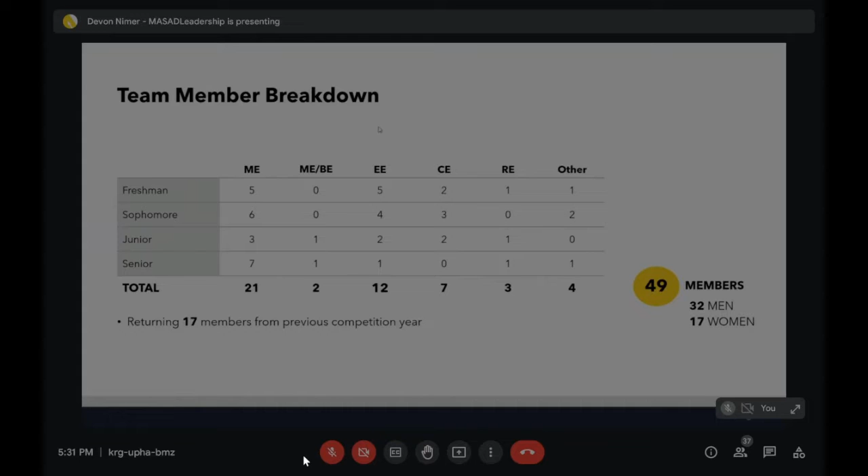Along with this, we will actually be having our certification class this year, as we did last year. It'll be led by Sierra, and we'll be doing open rocket classes and CAD tutorials, and we'll be launching at Alke Airport November 19th. We'll have 20 new flyers who will be able to get L1 certified. So we're hoping to get 20 new members this year after November. That'll be a really good boost for our knowledge base and getting everyone experienced in rocketry. We're really excited for that.

Each year we compete in Spaceport America Cup. The competition is to bring a payload to a target apogee. We'll be competing in the commercial off-the-shelf 30,000-foot category this year. So the target altitude is 30,000 feet, and our motor will be bought through a vendor, not made by students. Our location will be Spaceport America near Las Cruces, New Mexico, from June 19th to the 24th, 2023. It's hosted through ESRA, and the sponsoring agency is Spaceport America.

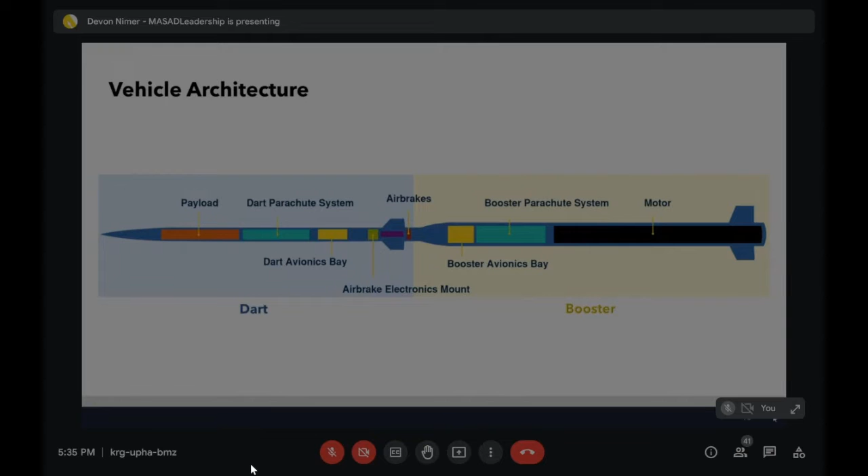Here you can see our vehicle architecture from the Dart to the booster. We actually have a boosted Dart configuration this year. It'll be a single stage with one motor, but it'll actually separate by drag. We'll go into that a little bit more in the airframe section, and you can see all the different components that we'll be going over in more detail in each project overview.

So it was a 6-inch diameter. Now we're switching to a 5 to 3-inch diameter, transitioning from a 5 on the bottom in the booster to a 3-inch in the dart. CubeSat payload is not possible this year, so if we wanted extra points we wouldn't be able to due to the 3-inch diameter. Also, we'll have more COTS microcontrollers in our payload this year for reliability. Since we have a newer electrical team, this will be very useful for us.

We also have airfoil fins with our new 30,000 foot apogee. We found that would be very useful for our flight. Some similarities are the air brakes, a similar or slightly different design, but similar application. Electronics for recovery are going to be the same, along with our tele-GPS.

So here's our payload summary. It's a body tube strain and data collection experiment. The main goal is to retrieve reliable and accurate flight data. That's what we've wanted to gain in the past, and we want a reliable way to give us data on how our flight went and information for next year. So sensing things like velocity, acceleration, temperature we've done before, but we want to see humidity, and also the big one is strain on the body tube, so we want to see what sort of strain forces on that body tube in the dart are occurring.

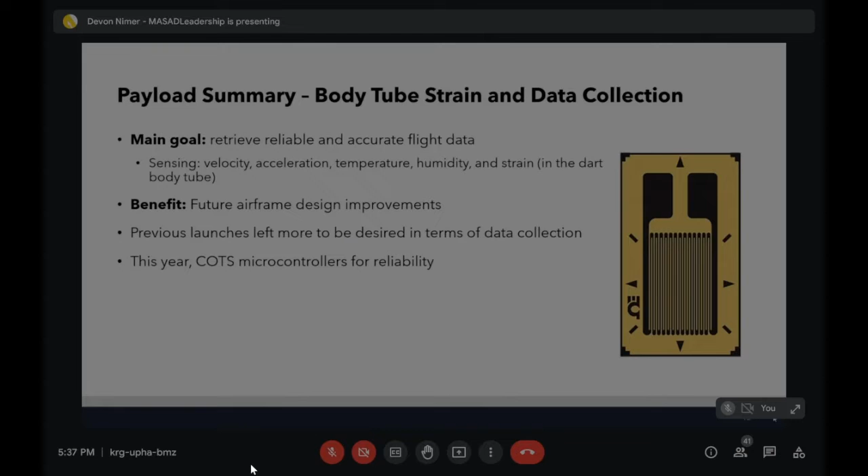And finally, here's our timeline. You can see some key points and milestones that we actually have. We began in June with our e-board elections, and we've gone down to October now, where we are at PDR. After that, we'll be gearing up for our first season phase in manufacturing. We also have some competition outlines if you'd like to read further. We sent these slides out, so feel free to view.

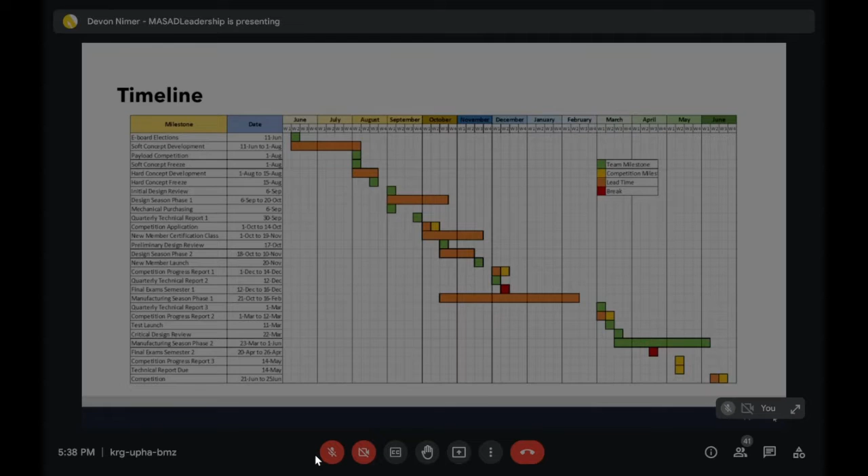Hi everyone, I'm John Florin, the mechanical lead. I will be taking you through the team structure, our systems engineering, our ConOps, and our mass distribution.

So I'm going to take you through the different sections of our rocket, starting with our upper dart. At the tip of our upper dart, in the nose cone, we're going to have a tele-GPS, where it will avoid interference from the metal frame structure of the payload. Then we'll have our payload to house all the data collection electronics. We'll also have a camera system mounted at the bottom of this payload, and below our payload we will have our dart parachute, which will be reefed.

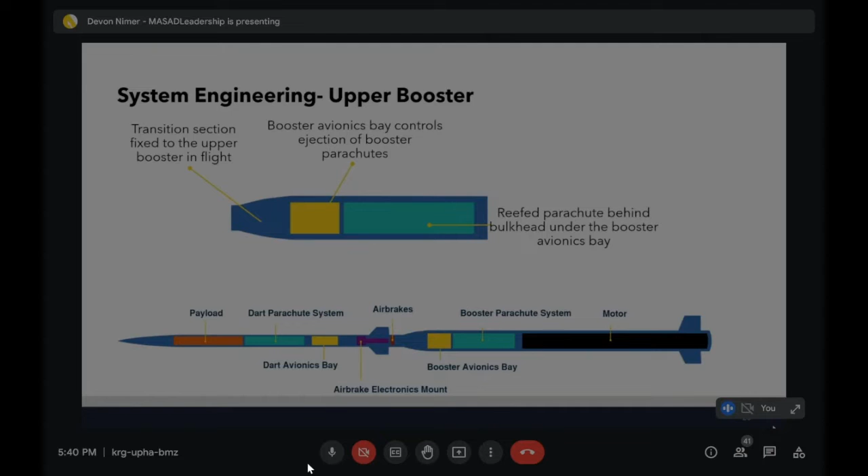To start off the booster, at the tip of it, we will have our transition section, which will connect our dart to our booster, given that it has a varying diameter. Below that, we are going to have our booster avionics that will control the deployment of our booster parachutes. And at the bottom, we will have our lower booster, which will consist of our motor and our airfoil fins. We'll have a thrust plate at the bottom to transfer the forces into our body tubes.

On the left of the screen, you can see the general overview of how different stages of the rocket will occur. We start with ignition, which takes us to motor burnout, and at that point our dart and booster will separate so the dart can achieve a higher apogee.

While the dart's achieving apogee, the booster will have already achieved its own apogee, where its parachutes deploy as reefed parachutes. Further along, it deploys its main closer to the ground, and then the booster hits the ground. For the dart, as we approach apogee, we plan to deploy air brakes if we're exceeding our target apogee of 30,000 feet. Once we hit apogee, we deploy another reefed parachute, which expands to main as we get closer to the ground.

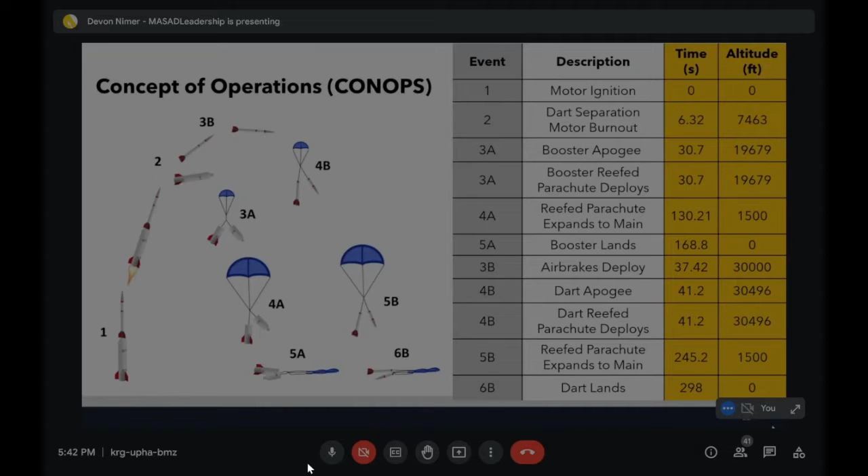And I'll hand it off to airframe propulsion.

Hello everyone, I am Andrzej Sterko, and I am airframe and propulsion lead. Today we will talk about air brakes, electronics, fins, and general airframe. I will let Sierra start.

Hello, I'm Sierra Stockwell. Today I'll be presenting the air brakes. We also have some new members working with us on the air brakes, Devansh Patel and Taryn Butler, but they're not quite ready to present yet. First, we're going to go over our purpose, then design breakdown, prototype, timeline, and testing.

The purpose of our air brakes is basically to decrease our apogee to get it as close as possible to target. We plan to overshoot, then bring our apogee down by releasing the air brakes at a select altitude. The air brakes utilize both electrical and mechanical systems. The difference between this year and last year's air brakes is that instead of using a stepper motor, we're using a linear actuator, so instead of twisting to open, they will be pushed to open, which helps with a lot of the issues we had last year. The benefit of air brakes is that they could improve the team's apogee score and increase design points.

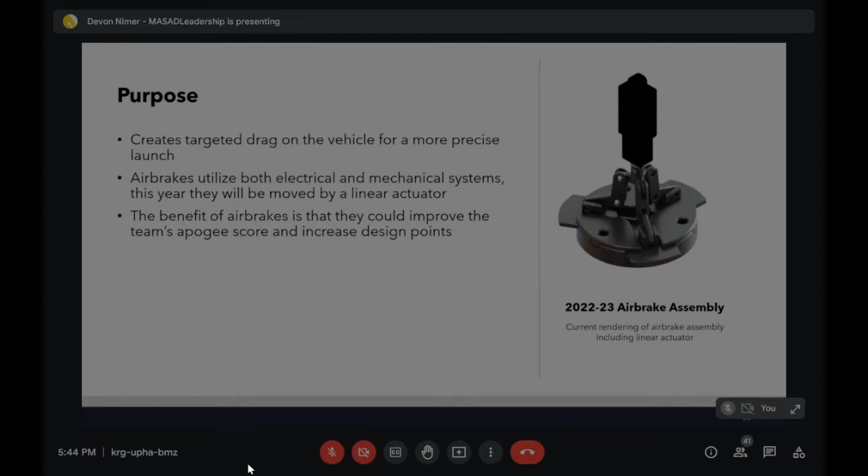There will actually be our linear actuator inside of it. The air brakes will slide up with the linear actuator and its mount into the bottom of the rocket. The electronics that attach to the linear actuator will mount above and attach into the top part of the linear actuator. We have added clearances between moving parts to avoid grinding, as that was a huge issue before, and tolerances will also be calculated before manufacturing.

We haven't begun CFD yet, but that is a huge part of this process and we will be starting soon. Our analysis season is beginning after this design review, so we will be testing if the air brakes make enough of a difference to justify having them, and if the wake after the fins is affected at all by the air brakes.

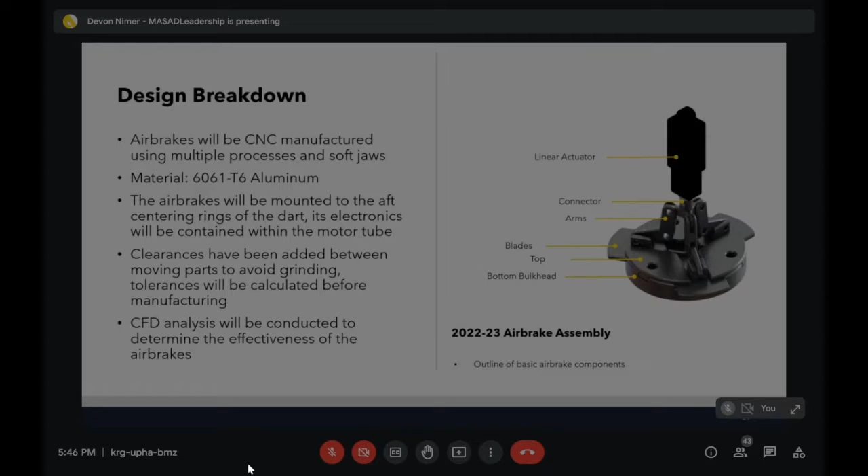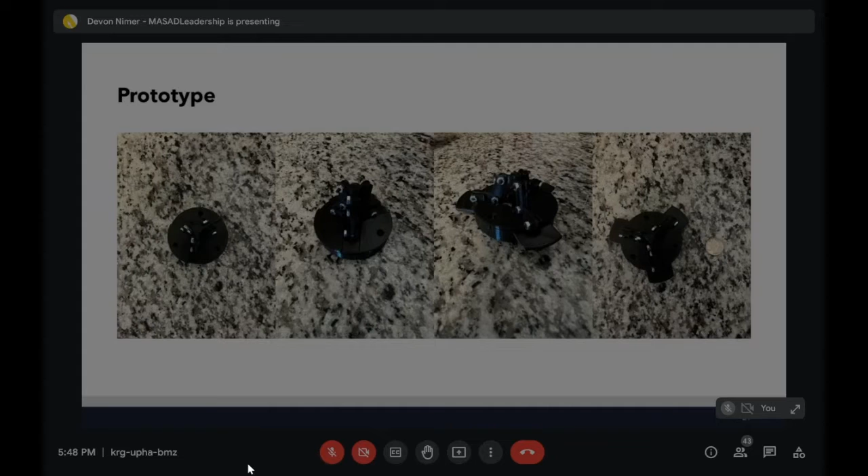Linear actuator testing we weren't able to complete yet due to the 3D printed prototype breaking a bit. So we've just got to reprint that little piece that the linear actuator attaches to, and then we will be able to test that soon.

And the metal prototype testing will happen sometime during manufacturing season, before the test launch, to test how the metal compares to the 3D print, since the 3D print experiences a lot more friction and we can't really lubricate it like we can with the metal part. So we'll see how that turns out compared to the 3D print.

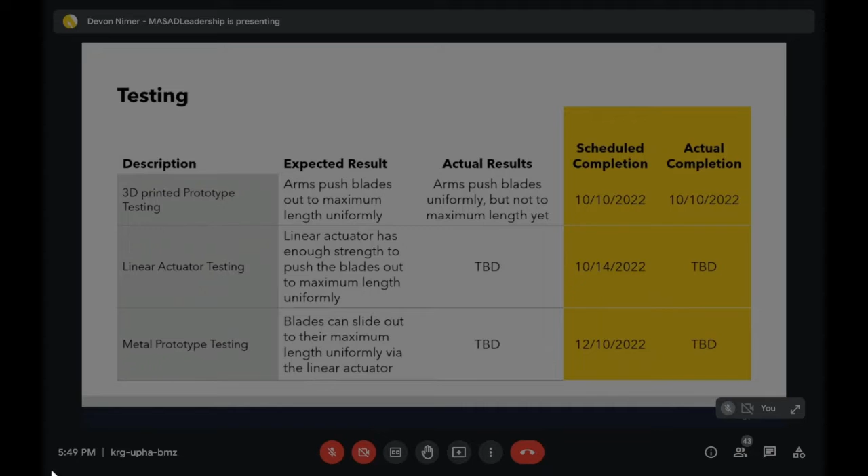Because of the size constraints of the 3-inch tube, we are going to have to use SRAD boards to mount all our sensors and SD cards and stuff like that. Aside from that, we're also going to derive an equation to find out what the proper linear actuator extension should be to get the proper extension for the air brakes plates.

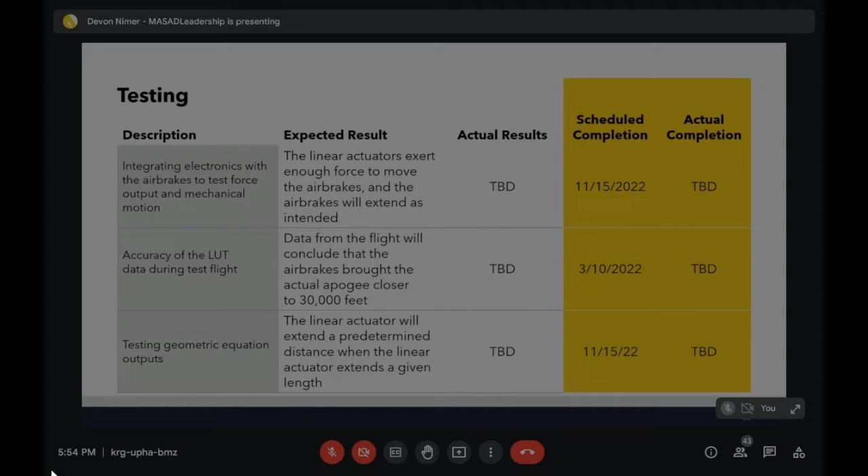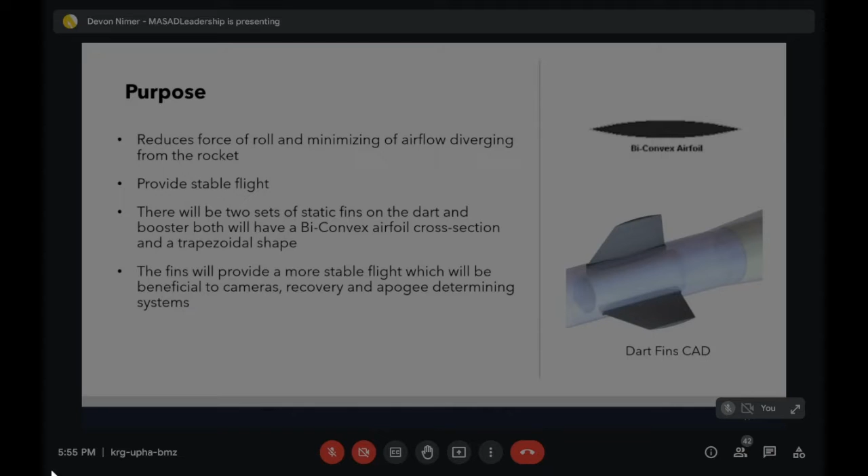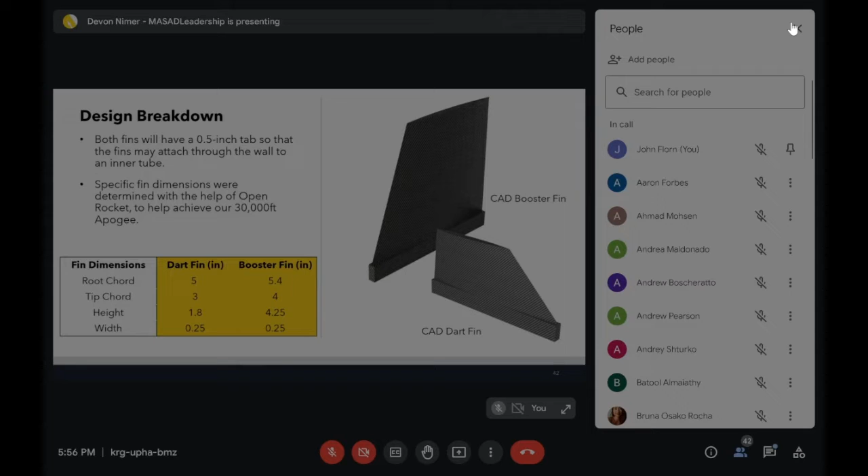Maxim. It looks like his microphone isn't working. No, we cannot hear you. Well, we'll see if you can get that working in just a second. Hello. There you go. Hi, I'm Maxim Rushko.

Sorry about that. So this is our design breakdown. Here you can see we have both CAD renders of both the booster fin and the Dart. We included a 1/2-inch tab on both fins so they could attach to the wall of the inner tube. That will help for mounting purposes.

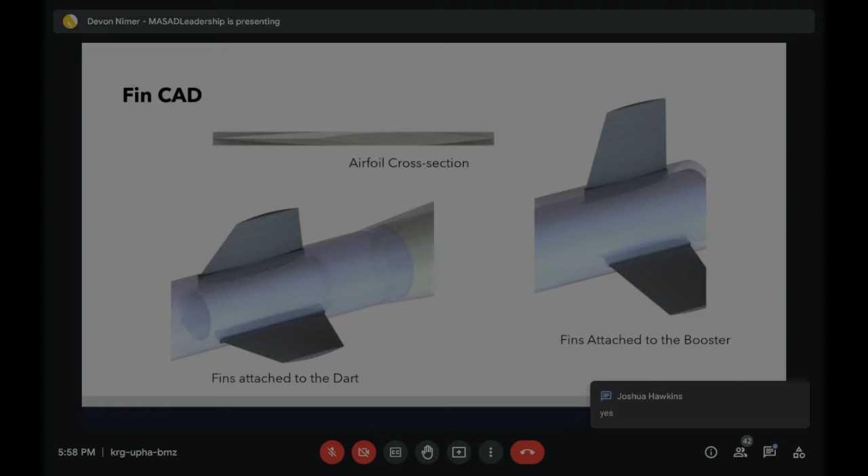So this is just a little bit of a breakdown of our fin flutter. The numbers that we calculated are using a theoretical shear modulus. We do plan to experimentally determine it once we get a nice specimen and we can take it to the lab. We use the equations shown on the right.

And so what we know is that our fin flutter that we obtain from using the equations on the right needs to be greater than our maximum velocity, which is 1915 feet per second. And so our Dart fins right now have about a factor of safety of 9, meaning that the fin flutter we obtained is about 9 times greater than our maximum velocity, and our booster factor of safety has about a 2.5.

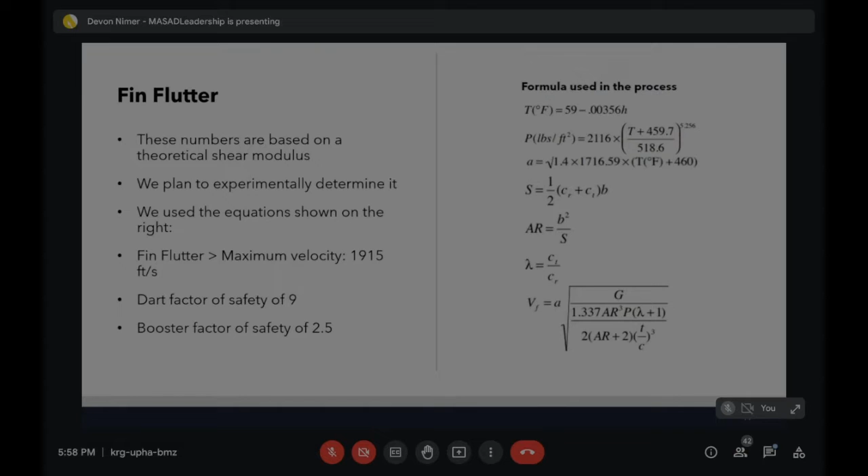Next slide, please. So this is just a slide on our fin manufacturing.

We've successfully made a fin prototype. We used 2 halves of a 3D printed female mold, and we made sure that these can be reused for all sets of fins. The fins are a carbon fiber epoxy resin, and they're a laminate, and they are not hollow, so it's just a bunch of layers of epoxy and carbon fiber.

There are about 30 layers, and each layer is rotated on a 90, 45, 90 pattern with epoxy in between. The 2 halves are then clamped together, and it is left to cure. No heat, no pressure required. And the fin tab is built into the mold.

On the right, the upper right, we have a picture of the manufacturing where we're layering the carbon fiber and the epoxy. And then we have on the left a finished fin. Next slide. This is just a picture of our fin prototype.

On the very left there, we have a head-on view. It's very thin and a bit difficult to see in this picture, but you can see the nice pointed edge and the rounded top. Then we have our side view, which is the trapezoidal side, and you can see there are a few imperfections on it, but overall it's a very good first prototype. And then we have an angled view there on the last.

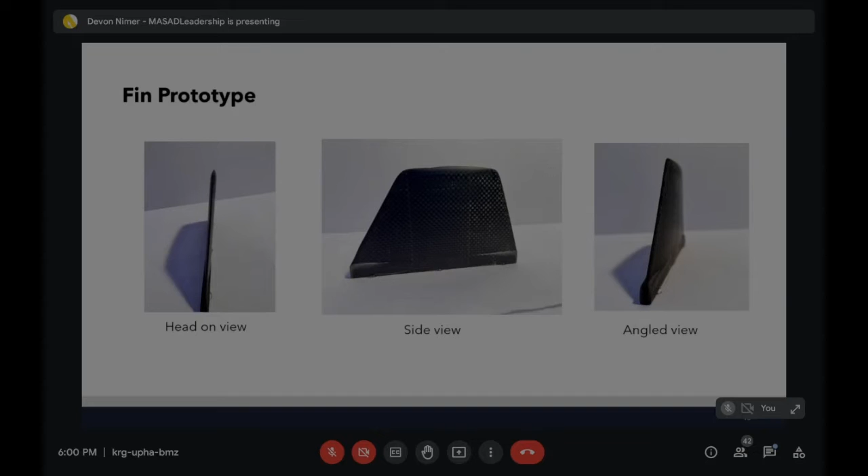Just a bit of a fin timeline. Our design season, we're well into that, and well into prototyping. We'll be beginning our analysis of CFD and more deep work in Open Rocket and simulations. After that is done, we'll be doing some redesigning, going up to about November, and then we'll start manufacturing. Manufacturing will continue until our test launch date of about March 11th. And then we'll go to final manufacturing, final touch-ups, final integration, fixing anything that broke, until competition.

So it's testing. We plan to test some manufacturing methods on how to make the airfoil shape, because that's been a big question in the past. Our expected result was that the fin would have the desired airfoil shape and wouldn't collapse in on itself or do any sort of weird, funky things. And that's what happened. The actual results: the fin had the desired airfoil shape, except for a few bubbles and a little bit of a divot on the top. That happened about a week ago and was completed about the day after.

We plan to experimentally determine the shear modulus so that we can get a more accurate number on our fin flutter analysis. We expect that the specimen will break, and then we'll be able to determine that number. We expect that to happen at some point in November. And then, of course, we have our test launch when the fins will be attached to the rocket. Hopefully they'll have minimum wear and they will not have broken off, according to our fin flutter. Our scheduled completion for that is, of course, the test launch, which is March 11th.

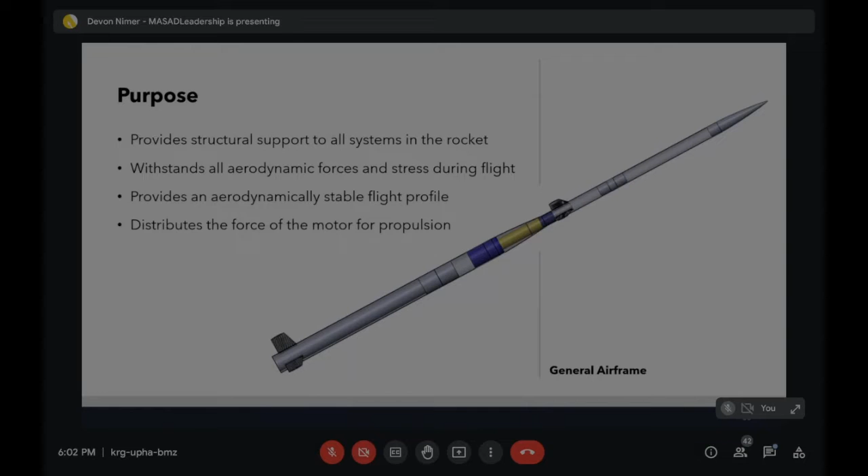For the design breakdown, the airframe consists of a COTS Von Karman nose cone, with the body and coupler tubes also being COTS G12 fiberglass. There will be a transition between the dart and the booster, which will go from a 3-inch dart to a 5-inch booster, as we heard before. The dart will separate due to drag naturally when the motor burns out. The total length of the rocket will be 12 feet 9 inches.

As mentioned earlier, the transition will provide an aerodynamic transition from both parts of the rocket. It will also be made out of COTS G12 fiberglass, just like the rest.

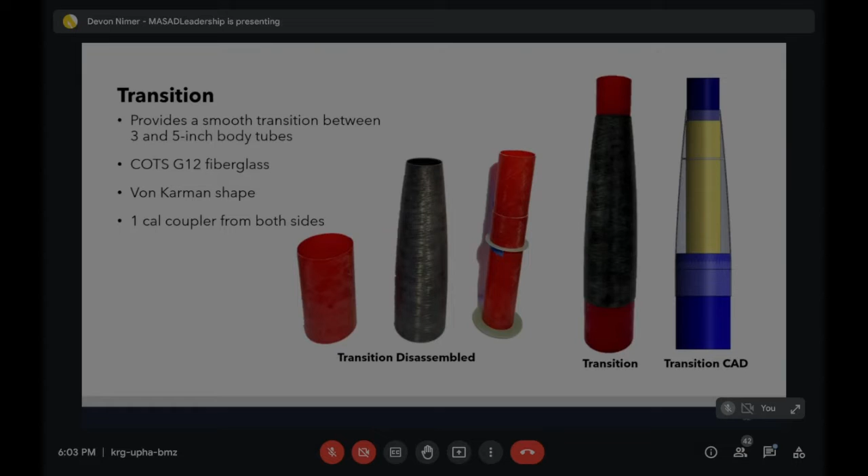So, some broad analysis. These are really rough right now since our systems are still being developed, so it's a living, breathing thing until all of the systems are fully developed. Right now our apogee is 30,400 feet, that's without air brakes, and flight time is 298 seconds, which is about 5 minutes. On the right is a graph that shows separation of the dart and booster. The important thing here is our max velocity — we're going almost 2 Mach, which is a challenge for us too.

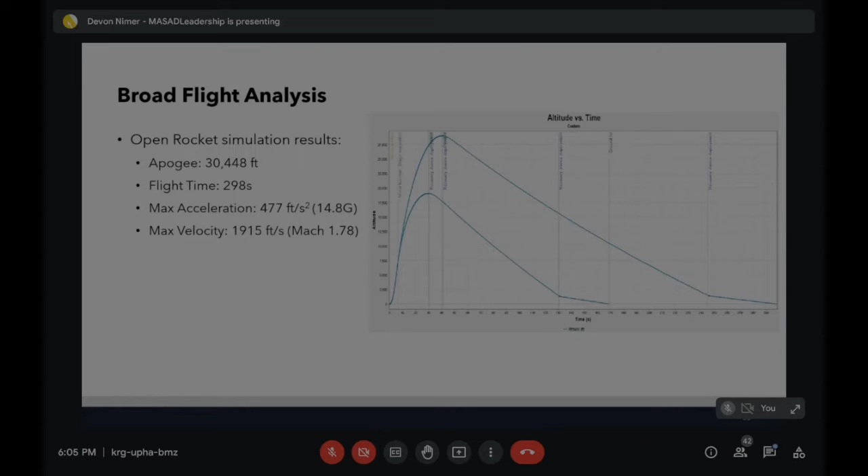Next slide. Here I'll go over our motor choice. We had another option with the N5800 motor, but we found through simulations that it's fast burning and our acceleration would go to about 22 Gs, which would cause a lot of stress on the system. So we chose a slower burning motor, the O3400, which gives a similar apogee, and our acceleration went down to 14.8 Gs.

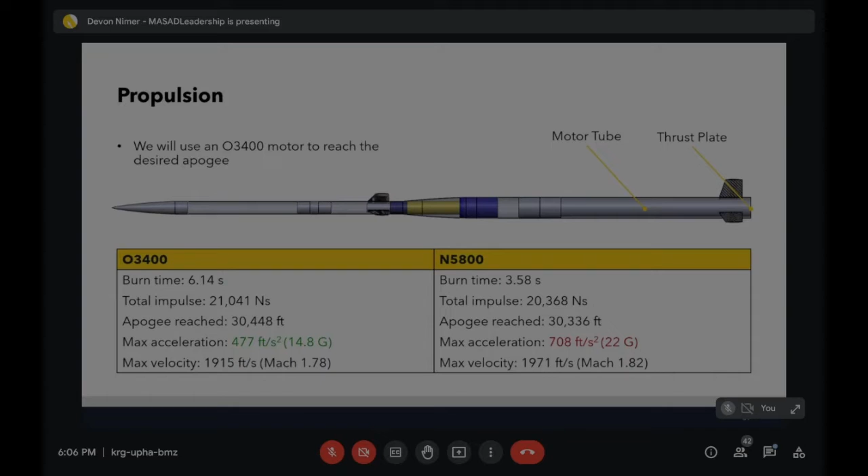Our general airframe timeline: we plan to finish the whole rocket before the test launch, and there are a lot of design adjustments we'll make as systems are being developed. After the launch, if needed, we might even rebuild the rocket. So we already purchased two sets of tubes and everything for two rockets in case we need to rebuild later.

For testing, one real way to test our rocket is to actually fly it or use a wind tunnel. Since we don't have access to a supersonic wind tunnel, we'll do a test launch in March in Muskegon using an M34 motor. We chose this motor because it gives similar stresses on the rocket, and it only goes to 10,000 feet, which lets us launch in Muskegon.

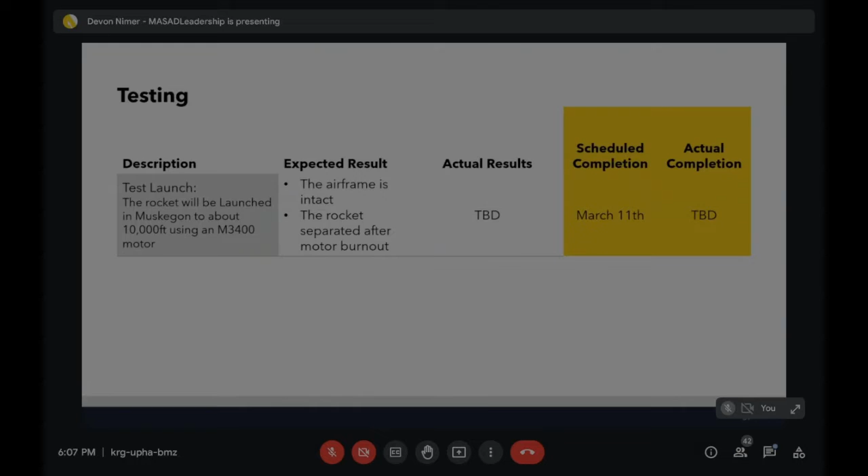Thank you. Hello everyone, I'm Jamal Kazada, and I'll be doing the parachute systems for recovery. Below are all the other people in recovery who'll do the next slides. Next slide. So, parachute systems.

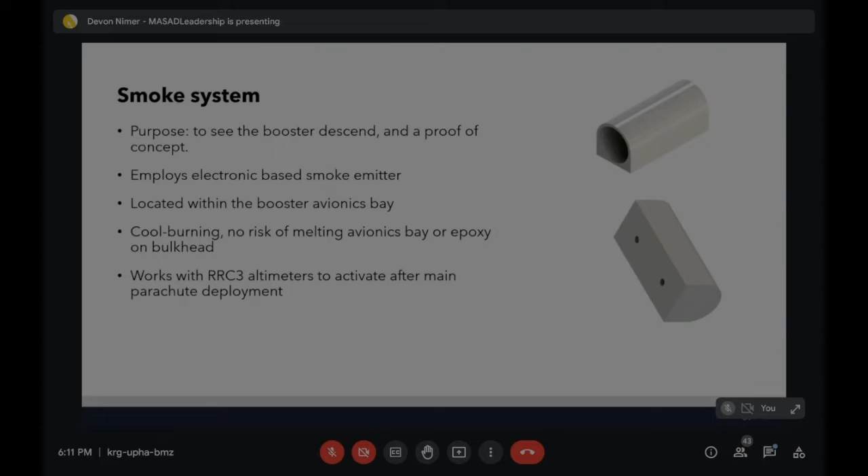Next slide. For our timeline, we have design season, then we get preliminary values, which is where we're at right now. Once everyone gets their masses locked in, we'll obtain final values and start manufacturing for the test launch on March 11th. If there are any changes needed, we'll readjust and possibly remanufacture or make edits to the parachute.

Next slide. For testing, we're going to use OpenRocket calculator to get better snatch force predictions, and that's going to be around February of next year.

All right, now on to ejection systems.

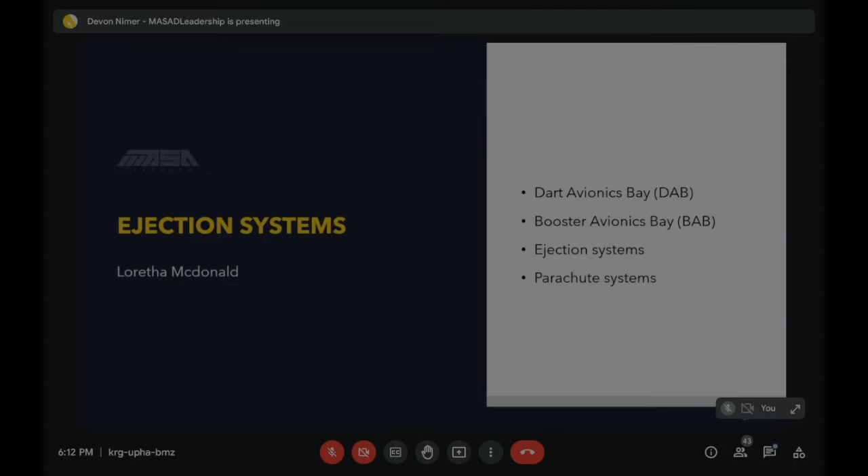This year, we will use Phoenix connectors to make integration across bulkheads easier, and we will practice assembling burritos with sand to get ready for launches.

Right now we are updating the values, seeing if there's any corrections that need to be made to the calculations, and we're going into manufacturing and testing, somewhat the ejection testing before the test launch. We'll adjust the values around March 20th to May 1st if anything needs to be changed for the main launch in June, and there will be a possible second ejection test early May.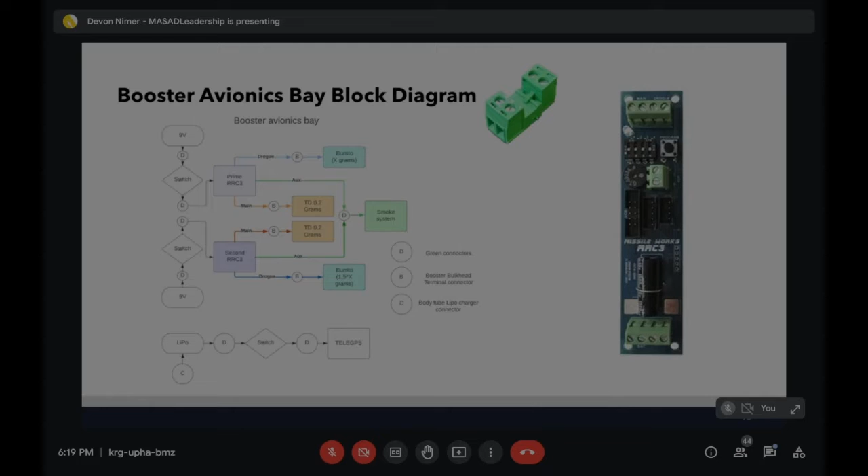For the testing, we're going to be doing two types of tests. For the drop testing, we're gonna find out how much force they can withstand, and for the altimeters we're gonna use a vacuum chamber. The testing schedule is going to be occurring during this December.

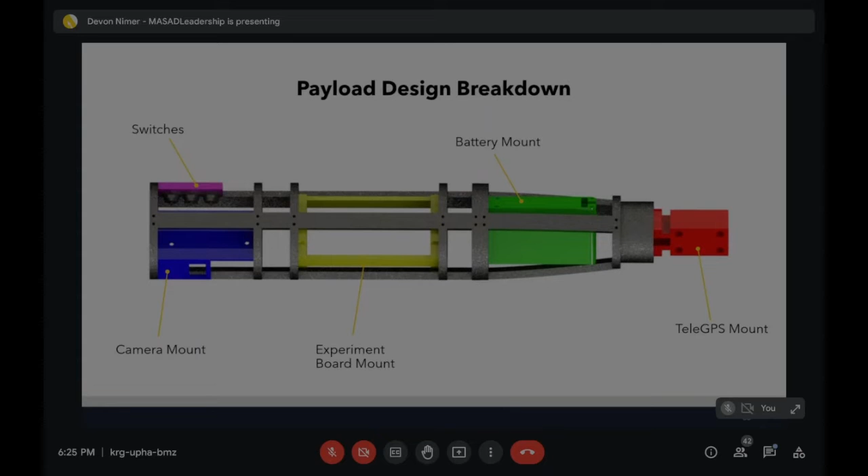This is this year's payload breakdown. We have the switches on the bottom along with the camera mount. In the middle, we have the experiment mount. On the top, we have the battery mount, and the tele-GPS is mounted on the very top of the ballast.

The purpose of the payload is to house the main electrical components, such as the GPS tracking device, the tele-GPS, and the experiment, which is the strain gauge and the raw data board, along with video capture. We chose a von Karman geometry this year to help with the 3-inch diameter we were given for the dart. It allows for maximum mounting space, and the mass is around 8.3 pounds.

For manufacturing, the upper section will house the batteries, and the lower section will house the experiment board and the camera. The ribs and bulkheads will be manufactured out of A36 steel, using CNC to manufacture the bulkheads and ribs. The upper and lower sections will be attached with quarter-inch steel bolts, and wireways will be added for the strain gauge.

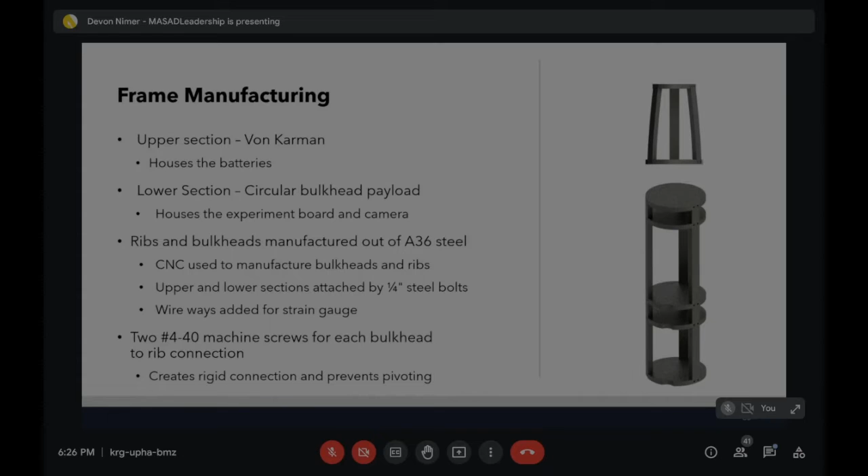We'll be using two 4-40 machine screws for each bulkhead-to-rib connection to allow rigid connections and prevent pivoting.

Our new payload members have designed and begun prototyping the different mount designs. As you can see here, we have the designs for the camera mount, the tele-GPS mount, the experiment board or SRAD mount, and the battery mount.

PETG has a higher glass transition temperature, so we are going to use that as our filament to 3D print the mounts, and we are using heat set inserts for reassembly.

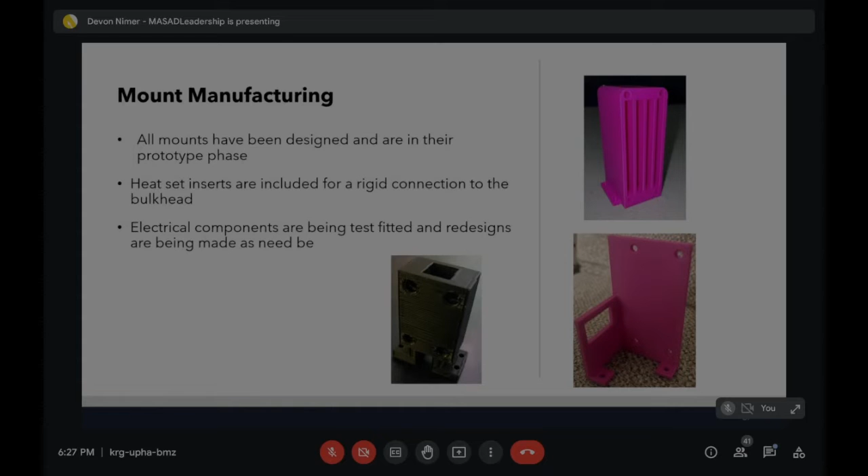As I said before, all the mounts have been designed and are in their prototype phase, and the heat set inserts are being included for a rigid connection to the bulkhead since we found that to be the most stable. We are test fitting the electrical components and changing the designs as needed.

Hi, my name is Caden. Our experiment overview is a strain gauge on the body tube to measure the body tube strain as the dart is in flight. This will collect data that allows us to calculate and better understand the stress and forces the body tube will experience going to 30K.

This is the first time going to 30K, so this data is valuable for future rocket designs and future teams to reference when designing. We will do this by putting two strain gauges perpendicular to each other on the payload body tube, one to measure axial strain and one to measure transverse strain.

Poisson ratio will relate transverse to axial strain. The use of both gauges in half-bridge configuration will cancel out thermal strain. The jig will be used to install gauges, and wireways manufactured into bulkheads will ensure safe integration.

We just finished up the initial design season and have moved into the prototype and initial integration phase. After the initial integration of the electrical components, we'll move into redesign, and around the new year we would begin manufacturing the main frame and testing it. After testing, we want to remanufacture, then around May move into final integration.

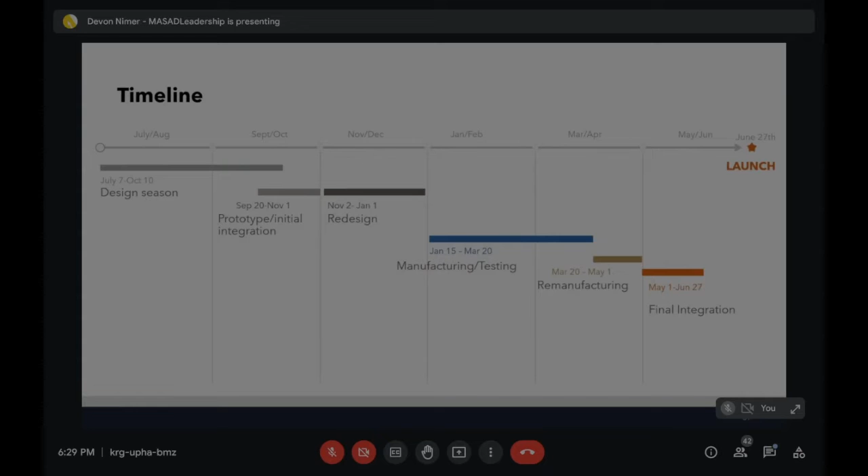For testing, we want to run mount and frame shock testing so there are no fractures or warping between the bulkheads and ribs. We also want to run a camera vibration test so we can discover different dampening methods for better video quality. And we want to run a battery life test to ensure the batteries operate for the expected amount of time.

Hello, I'm Sam Medalio, and I'll be presenting. Andrew Pearson and Rejwan Haq will be presenting with me for the payload electrical. We'll be going over the GPS, the dashboard, the cameras, and the onboard experiment.

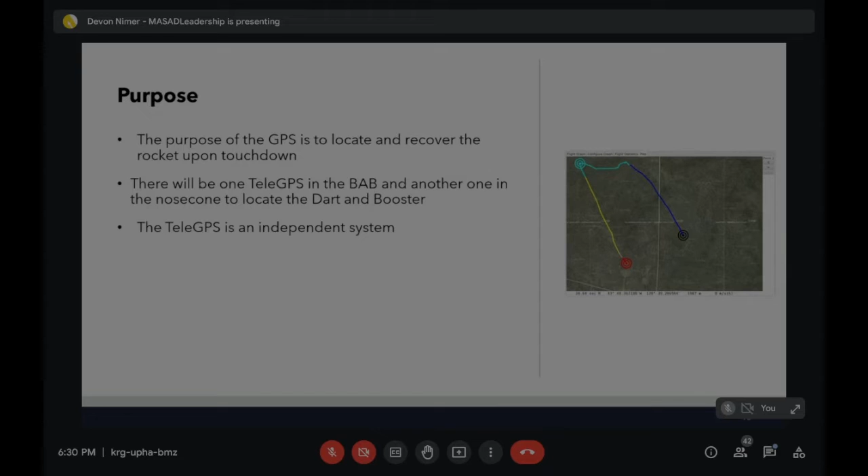The purpose of the GPS is to locate and recover the rocket upon touchdown. There will be one tele-GPS in the BAB and another one in the nose cone to locate the dart and booster. The tele-GPS is an independent system. It doesn't need anything else to run.

We will be using a COTS Altus Metrum GPS powered by two 3.7 volt lithium-ion batteries in parallel. The tele-GPS will use a whip antenna to transmit data at 900 megahertz. This may change to 400 once we have some ham certifications. I know a few of us are looking to take that test pretty soon, so we'll see how it goes, and hopefully that will be the case.

Data from the tele-GPS is stored locally on the rocket and locally on a ground station on a computer with a hard drive. Onto the hardware block diagram.

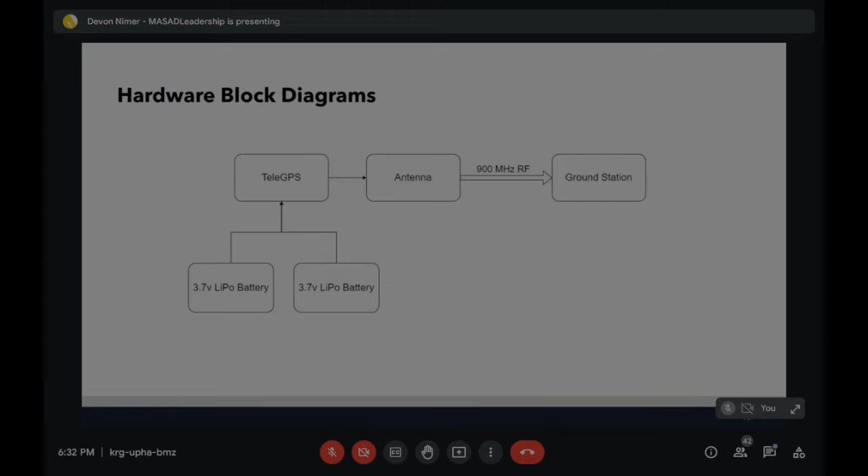The tele-GPS takes in power from two 3.7 volt lithium ion batteries. Then it transmits to the antenna, which sends the information to the ground station. That's how that'll work. Do we have a software block diagram? No, we do not.

So the testing, we will have 3 different tests. The first one is the distance test. The tele-GPS will give reliable data regardless of the distance between the ground station and the GPS. That's the expected result. We haven't quite tested that one yet.

The scheduled completion for that will be on November 10th. The battery life testing, we want it to last over 4 hours constantly on, because you never know when you're going to get going, and you can't really go into the rocket and connect and disconnect the battery over and over again. So we want that to last for over 4 hours. The actual results are to be determined, and that'll be on the same date.

The last test we will be doing is checking the GPS's signal at various orientations mounted with the bulkhead. The metal bulkhead will have little to no RF interference with the GPS. We just want to make sure that it'll send a proper reading through all of that, and that'll be in January of 2023.

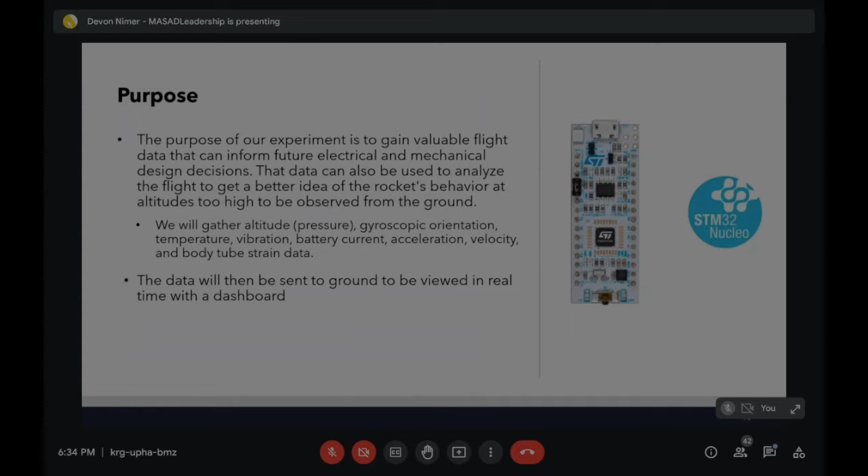We will be using an STM32 Nucleo, which will be powered by two 7.4 volt 1250 milliamp hour lithium ion batteries. The Nucleo will be collecting data from the sensors, as mentioned earlier, and it will be storing it in an SD card and transmitting it to ground using an XBee transceiver. The experiment will be sending out this data every 20 milliseconds.

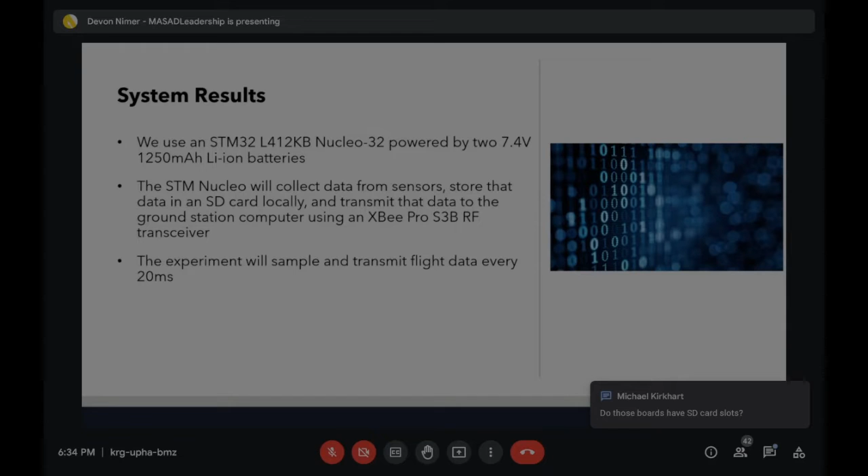Aaron will present the hardware block diagrams. All right, so if you look here.

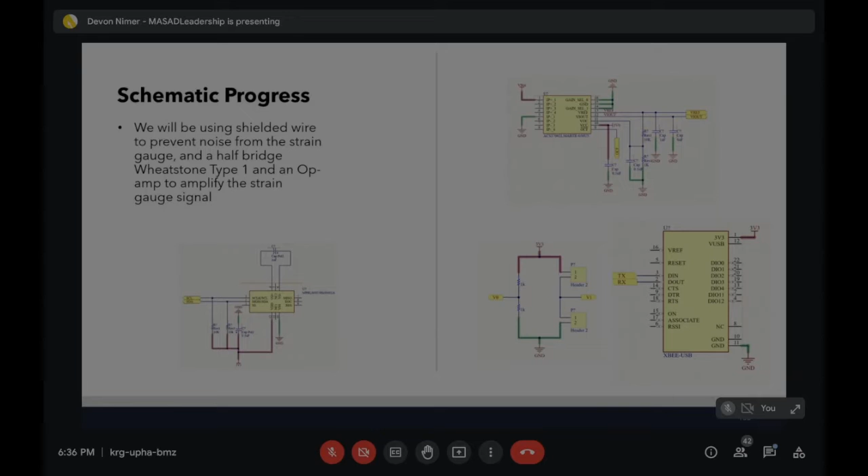Here's our current budget for the experiment board. We have our Nucleo at the top, with our average current being 450 milliamps, making up most of the current draw for the batteries. We have a max current of 800 milliamps for the Nucleo, and we have a bunch of average and max current values for the other sensors and the SD card. Here's our total current for the average and max currents.

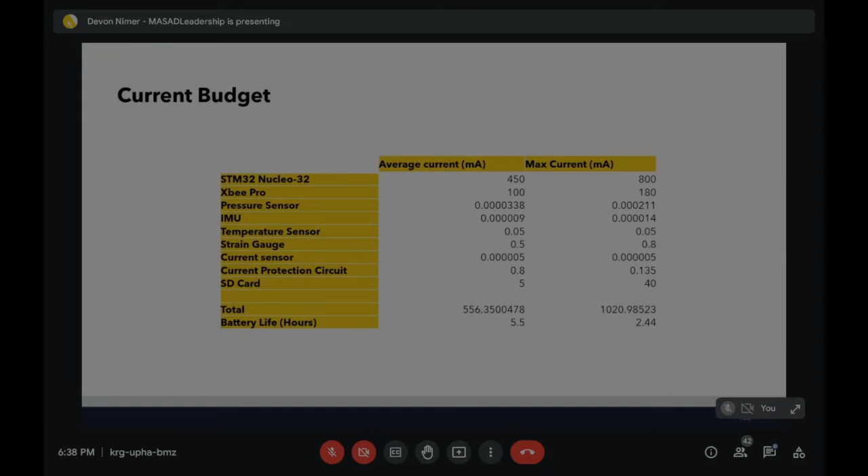We are expecting our battery life to last at an average of 5.5 hours, and at minimum no shorter than 2.44 hours. Now, next slide.

Hey, it's me again. I'll be presenting the dashboard to you guys. The purpose of the dashboard is...

The ground station on a laptop will receive flight data from the rocket to log and graphically display the data for members to view in real time. There will also be an option to view the exact data in spreadsheets as it's updating.

We will use an STM L412KB Nucleo-32 powered connected to the ground station. An XBee Pro S3B with an antenna will receive data from the payload. Onto the next slide.

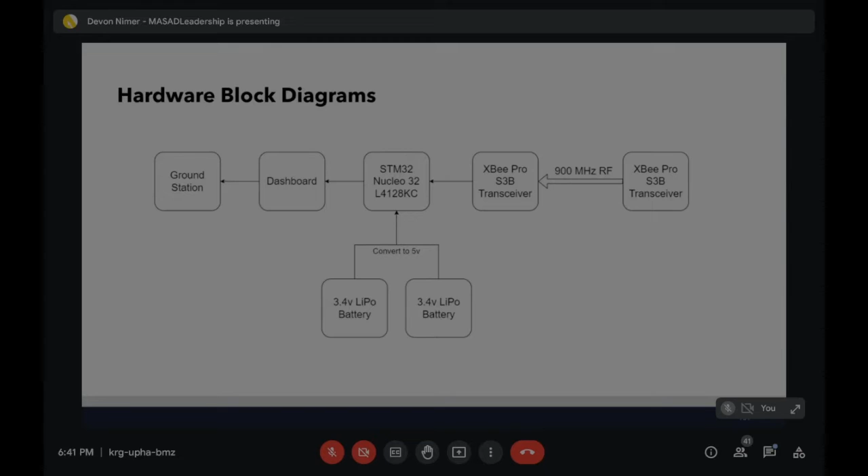It'll take you through the creation process where you can give your project a name and save it to a local file. You can then start the flight.

It'll look for the signal from the STM32 and go through. If it's not received, it'll try a few times and then display an error to show you nothing's connected. At that point, you can determine what to do from there.

And then moving on to the post-flight data, you push the end flight button.

The data is saved, and then you can either reset the flight and save, or just delete the data depending on what you're trying to do. If it's just tests, you might want to delete the data without saving a bunch of clutter. Or you could exit, start a new program, or open an existing one. All of these options will ask you to save, because during competition it'd be quite unfortunate if you lost all of your data because you didn't. And I believe that's all there is to that.

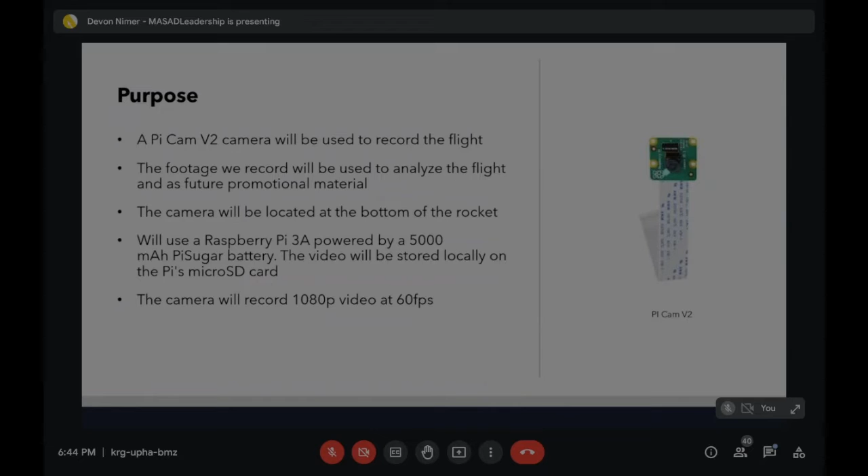It will be using a Raspberry Pi 3A, powered by a 5,000 milliamp Pi Sugar battery, and the video will be stored locally onto the Pi's micro SD card. The camera will record up to 1080p at 60 frames per second.

As for the software, it will start and create a directory to store new files in. It will start recording, and after 30 seconds, it will start a new recording, as long as there's room on the SD card.

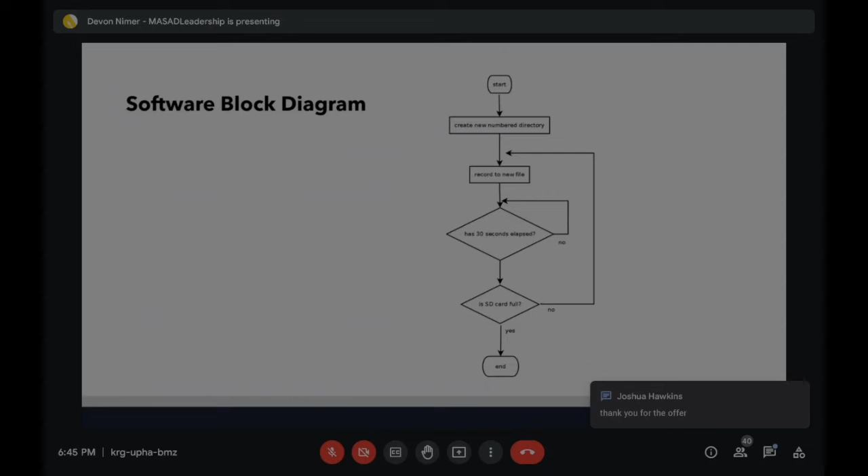We're going to start programming our payload electronics around October 25th through January 1st. From January 1st to February 1st, we plan on soldering all of our schematics and boards. And from February 1st to March 10th, we will be doing testing and troubleshooting for all of our electronics.

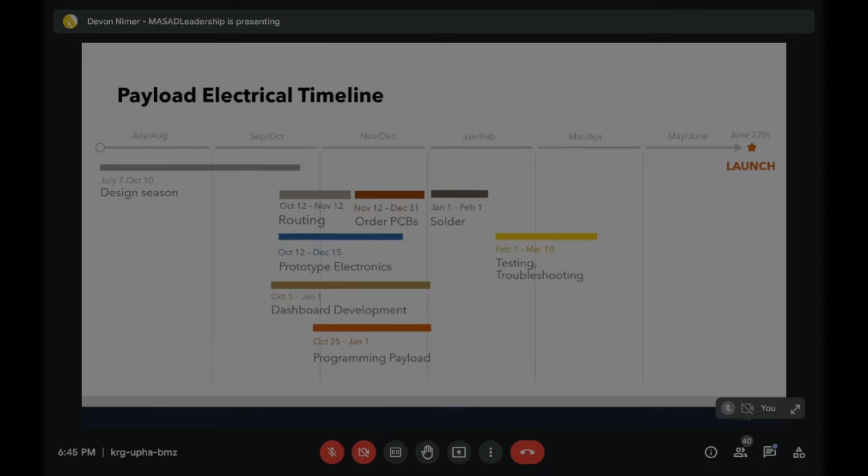You can review this further in the slides we sent you as well. I'll go through some of the payload risks, and then John will go through airframe and recovery. So the switches are an important part of the rocket.

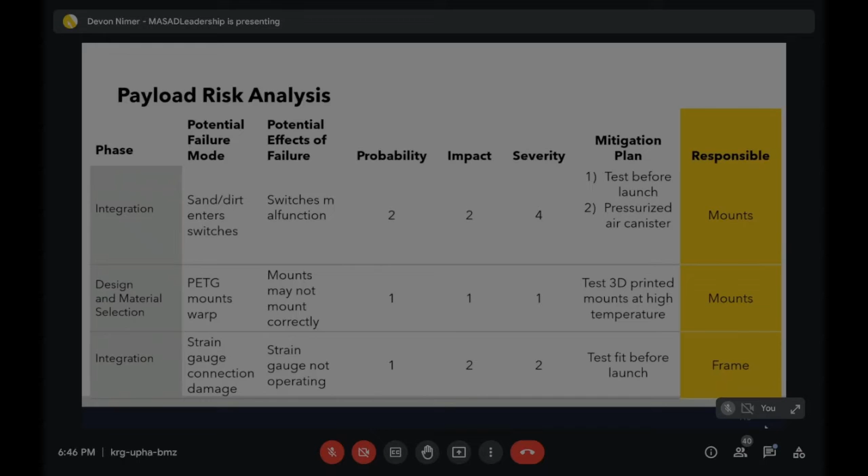We've found that sometimes sand or dirt can enter the switch. So what we need to do is verify through our test flight that we will be able to actuate the switches correctly. If we run into any issues with that, we may come up with solutions to mitigate it, such as not necessarily pressurized air, but something along those lines to clear out any dust or dirt that interferes with it.

Along with that, for the tele-GPS electrical, we really need good signals without any faulty data points. So we want to test interference with the bulkheads, and our test flight will be a really good test for that. But before that, we want to have our tele-GPS on a mount under the nose cone, and we want to see the range for how far until we receive faulty data or none at all.

For our recovery electronics, our first potential failure point is our dart and booster avionics. If we don't have our avionics working properly, we won't be able to record our flight altitude and deploy our parachutes. This would have a major impact, so we are going to go through various testing to make sure that we can reliably operate our avionics.

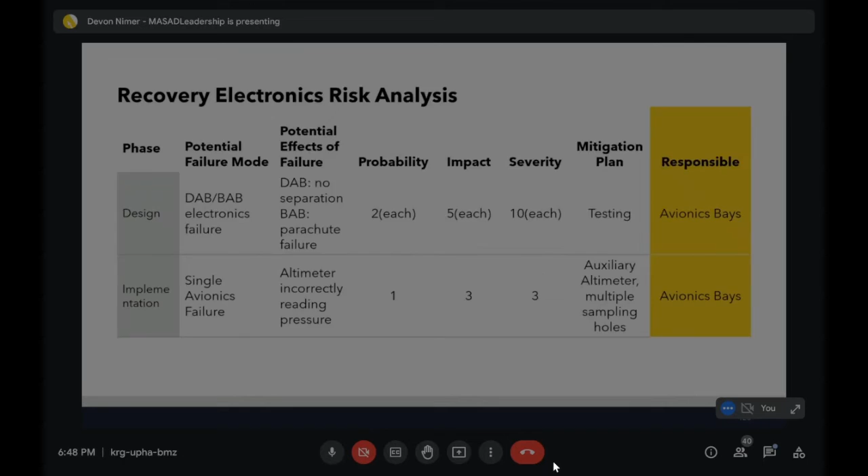Another big potential failure mode that we're trying to remove is tangled parachutes on ejection. To mitigate that, we are going to double check, triple check that our parachutes are packed correctly so that we do not get tangling, because if that happens, then we might not even recover a rocket.

Next one is our main deploying at apogee. The biggest downside is we will have to go a long way to recover the rocket, and at that point we might not be able to get data from GPS. So we need to make sure our reef parachute deploys at apogee and our main deploys closer to ground, and we are going to triple check our systems, including the reefing line and hardware on the parachutes.

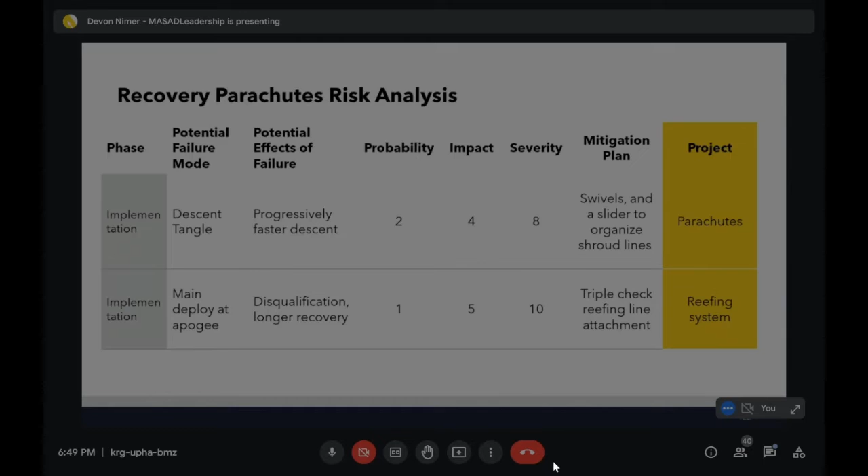Going on to airframe now, our first major failure mode is that our fins break off during flight. At that point we have no say where the rocket's even going to go, and it's definitely going to fail. So we are going to emphasize the structural mounting of our fins through the wall onto our motor tube with fiberglassing, so that we don't encounter those kinds of failures. We are also going to use a fin jig during this process to make sure our fins are properly aligned and we do not have spiraling flight.

Our next one would be failures due to air brakes. If the blades end up moving by themselves and not as the linear actuator and our testing would suggest, then we would have uncontrolled flight when the air brakes deploy at an unopportune time. So we plan to use a limit switch to make sure that we do not have any incorrect deployment of our air brakes.

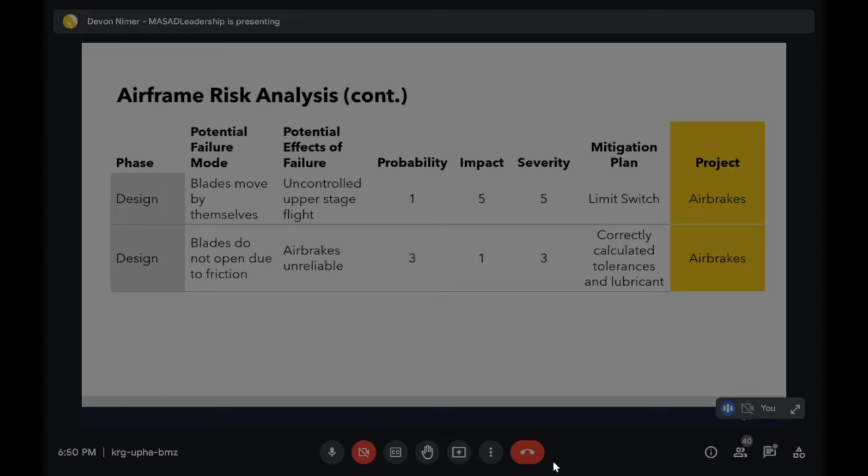Now on to the general airframe failure modes. The biggest one is that we do not actually have separation during our flight, and we're going to test that during our test flight. We're also going to analyze the friction between the coupler and lower dart, so that we can do force analysis to make sure the coupler of the transition does not stick to our upper dart.

Devon, your mic's muted.

Yeah, so we'll be going on to project management here. John, would you like to talk about the mechanical design completion? Oh yeah, sorry, my bad.

No, you're good. We have made a lot of progress on our mechanical designs, and as you can see, a lot of our sub-teams have already progressed into prototyping and analysis. The main points we need to keep working on are payload mounts, continuing to make sure those go through testing and that the designs get completed properly. We still have some work to do with our strain gauge experiment, making sure everything's mounted in a way that it's possible to integrate.

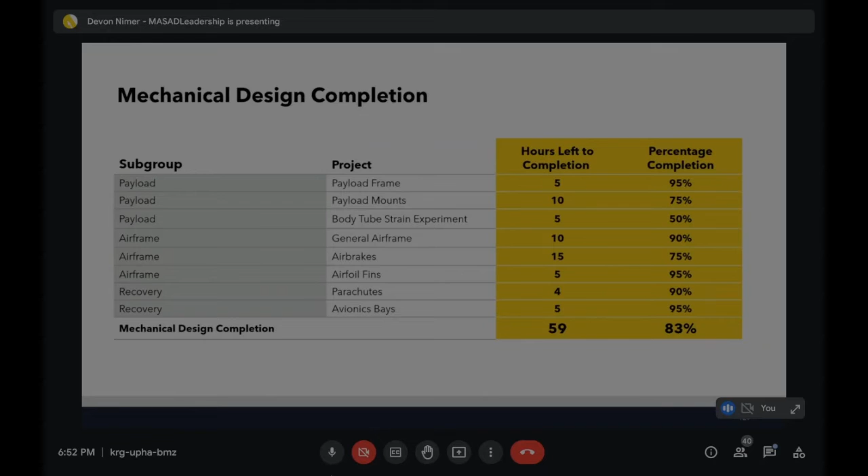But yeah, for the SRAD hardware, we still have to finish the schematics, do routing, and solder after the fact. Board programming, we haven't done a whole lot of progress on that. We're still training members on programming the STM32s.

For dashboard software, again, we're still teaching members how to do programming for that as well as the hardware. Tele-GPS, we're almost done with that. We've been having some issues getting the software to work. We think it might be an issue with the batteries, actually, but yeah, we're almost done with those.

And software air brakes, we've been doing a lot of research and lookup tables, but we still need to program the actual hardware. Air brakes hardware, we have a good chunk of it done, again just finishing schematics and routing. After that, the avionics bays doesn't take a whole lot of time to finish, so we're almost done with those. Yeah, about 40% done with progress.

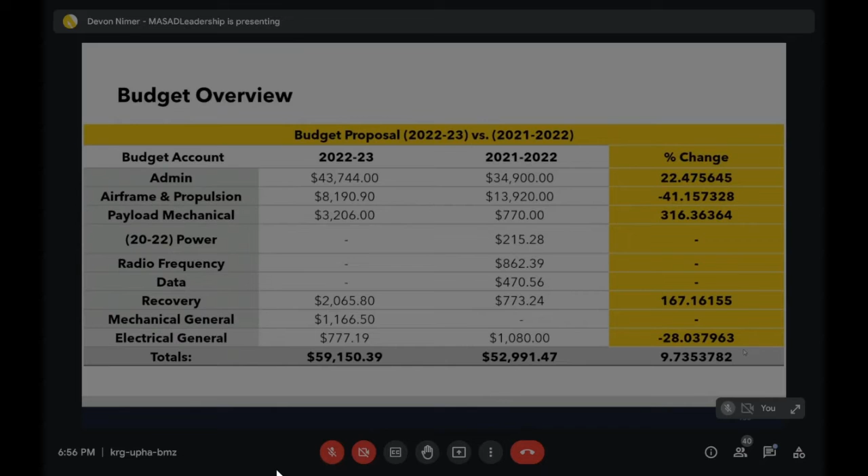Some other key reasons for the increase: reliable and standardized rocket kits to improve certification class success rates. These kits can also be used for L2, so it helps us save a little bit of money further down the line. And the test launch also requires new motors and backup components, so that's a new expense we have to deal with.

We didn't have a test launch last time, and we didn't use a motor, so if we have any backup components that need to be purchased, we will. Along with that, purchasing necessary tools and tooling, like I said, this will be for our general electrical and mechanical budgets.

So here's our funding sources. We've requested 30,000 from CCS, and we are soon to be hearing from them about the status of that. 20,000 from the Woods Foundation, Ford Motor Company 5,000, Giving Blue Day 2,000, Magna 2,000, and Kalitta Air 1,000. So totaling $60,000.

And here's a thank you to our sponsors for supporting us.

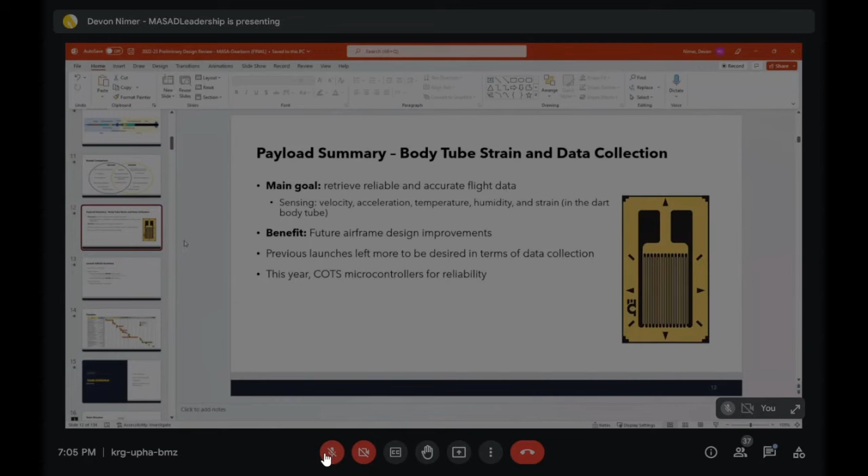For the motors, I noticed the M3400 is a Cesaroni motor. I don't know if you guys have a case for that. So if you were looking to save some money, if you went with an Aerotech motor, I know that we have more cases, and cases will run a few hundred dollars, so it just saves you some money if you wanted to find something for a case that you already have. I don't think you have the Cesaroni 98 4-grain case, but correct me if I'm wrong. No, I don't believe so. And you may find that availability is going to be a problem for you as well. So if you do need one, let me know and I will ask the high power community and we'll find you a loaner if you need one.

Oh, we would appreciate that. Yeah, thank you. I know we had a real hard time last time trying to get a Cesaroni case, it took about 8 months. Yeah, I remember that. That'll be interesting. Next, I'm on slide 23.

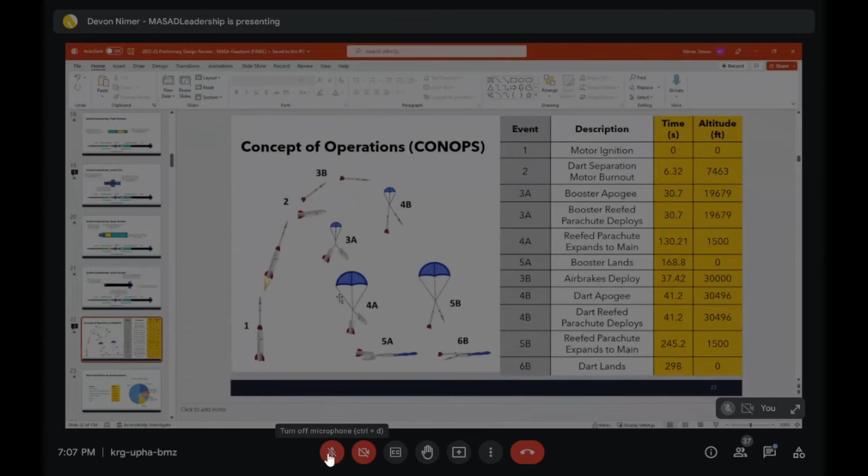All right, before you go to 23, I got one at 22. All right. So your air brakes deployment, you're doing it directly at 30,000 feet, and you only have roughly 3.5 seconds for your total air brake phase. Is that even enough time to fully deploy your air brakes and get enough slowdown?

Or I can talk on that. So we're going to do the CFD analysis going forward, so we don't really know how much of an effect it'll have just yet. So once we get a little bit more information, we can choose a better time to deploy our air brakes. So it's not really set in stone yet. It's just showing that it'll be close to apogee, close to 30,000 feet when we deploy it. So we still have some work to do to make sure that we deploy it at the optimum time.

All right. Yeah, I know when I did my control system, I had 6 to 7 seconds, and I found that I was only able to bleed like 100 feet in 6 seconds. So be prepared to need as much time as you can get. Okay, yeah, thank you. This is actually where my comment was on too, I had the wrong slide number written down. But they should deploy, at least based on the previous methodology that we used, when booster separation occurs, so that you have the most amount of time to have an effect on the flight, because if you deploy them at 30,000, your gain is going to be very minimal. I see. Okay, thank you very much.

Yep. And then my next thing is on 36, if anyone's before me. We have, I guess 27 is one that we got.

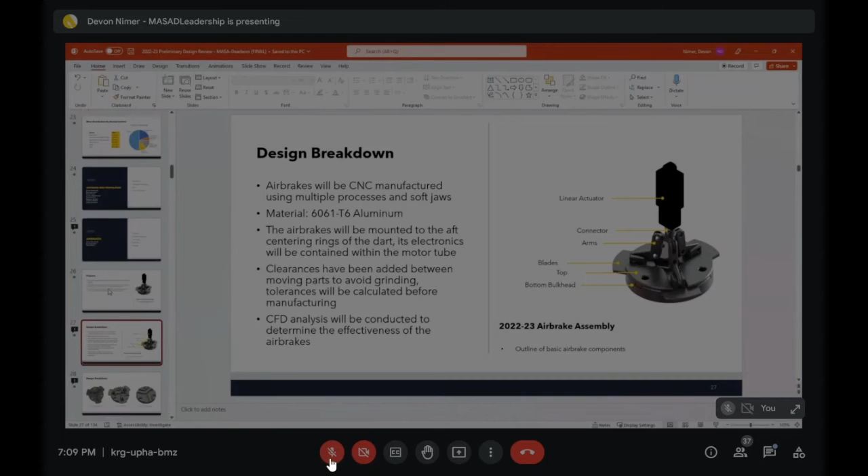All right, anyone else before 36? I got 34, going on 34. Oh yeah, we got 34 as well. You want to go there real quick?

All right, so long story short, please don't use two separate batteries and hook them together, that's just kind of asking for problems from the LiPos. If you need a bigger battery, just get one larger battery. And I, honest to God, don't think you actually need a bigger battery. Additionally, your stuff says that you want to use the onboard regulators on the Nucleo. That's a bad idea because those are all going to be linear regulators, so you're going to end up getting like 50% power efficiency on that. So just swapping to a buck converter module, you don't have to route or anything, just literally slap on the board and use, will save you a ton of battery life immediately if that was actually your plan.

To extend off of this, I have a comment, something slightly different. When it comes to the power situation with the Nucleo boards, there are 3 reasons why the 7.4 volt thing's not going to work. One is the power efficiency Matt mentioned. The Nucleo boards step down its VIN input, or 7 to 12 volt input, down to 5 volts with a linear regulator, then step it down again with another linear regulator. So your efficiency is going to be absolutely terrible.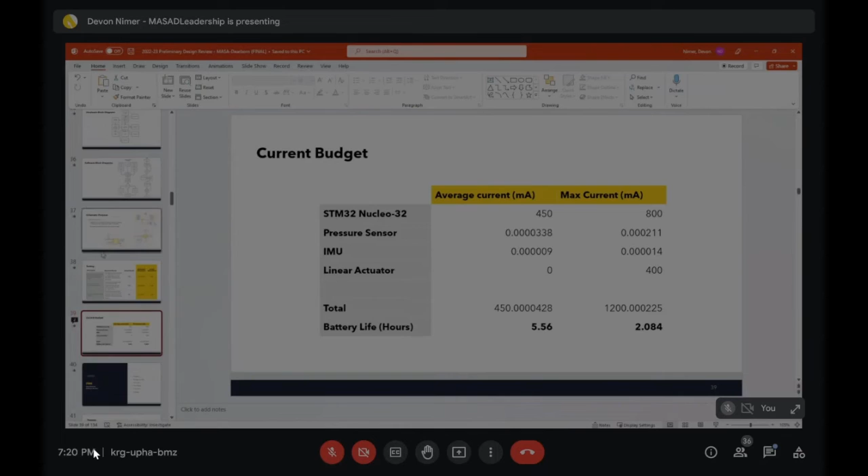Okay, a couple things. First one was the fin jig. I assume we're going to use a fin jig to get those fins straight. Are you just going to use a similar design to what you've used in the past? I think Sarah made it in the past. Yeah, so we'll be using a similar design to what we used in the past, especially since we can create a fin jig to be a bit more accurate to the shape of the fins we end up making. But yeah, we'll be using a fin jig.

Right, and I figured it might have to have a bit of a curve into it, because if you've got that flat, just flat, it might cock it a little bit.

My other question, technically not on this slide, is: are you guys going to use a thrust plate on the booster? Yes. All right, I just didn't see it mentioned anywhere, and I didn't see it in the Open Rocket. I know it's on the propulsion slide. Oh, I must be... yeah, all right. The one thing I would have mentioned is that on Open Rocket, at least, it seems like your back centering ring is pretty far away from it, so just make sure you can reach it for putting screws in. But that's it for me on 41.

Next, I'm on 54, unless anyone's before me. I got one on 46.

Just on the number of layers of carbon fiber, was the 30 number correct? Yeah, it was 30 layers of carbon fiber, and with more stringent, detail-oriented making of the fins, we could probably get more layers in there as well.

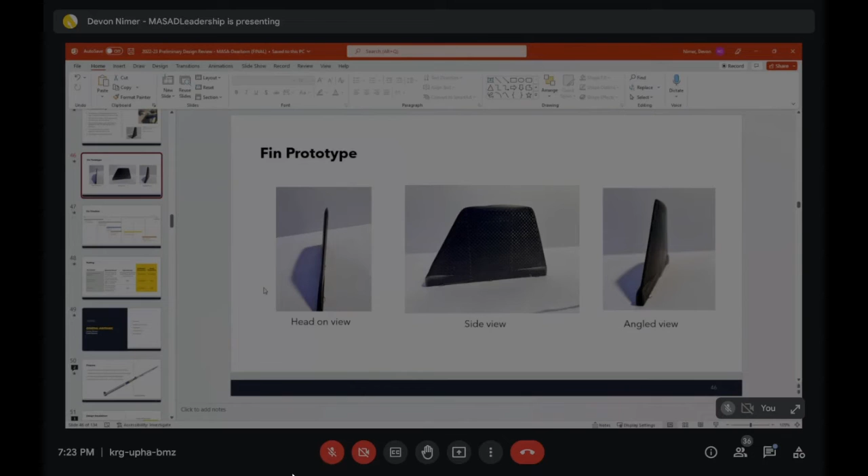Okay, but one thing to keep in mind is that your criteria here isn't weight savings, it's strength. Your booster fins are sitting next to 70 pounds of propellant, so triple their weight, who cares, as long as they aren't going to fold or flutter. That's more important. But can you back up one slide to 45, please?

I thought I heard at one point that no pressure was being applied to the layers as they were being glued up. While the presentation was going on, I realized I had misspoken. There is pressure, but not like a hydraulic press - there's the pressure of clamps. We're clamping it down with, I think, 5 or 6 clamps to hold these two things together the entire time while it was curing, so there is some pressure. I misspoke. That small pressure between the layers is enough to get rid of any air bubbles, so that's fine. But if there were no pressure at all, I'd be concerned about air bubbles building up between all those layers.

Yeah, we did see a few surface air bubbles, and I was thinking about potentially looking into the possibility of the team making a pressure chamber large enough to hold the jig of the fins, so that would reduce the bubbles. Or vacuum bagging could work as well - go the opposite way, instead of building up pressure, you create suction. And it's a lot cheaper to build.

Okay, my only comment with clamping would be just make sure you clamp until you know the resin is cured, because if you take it off before the resin's cured, it's not going to be great. Yeah, definitely.

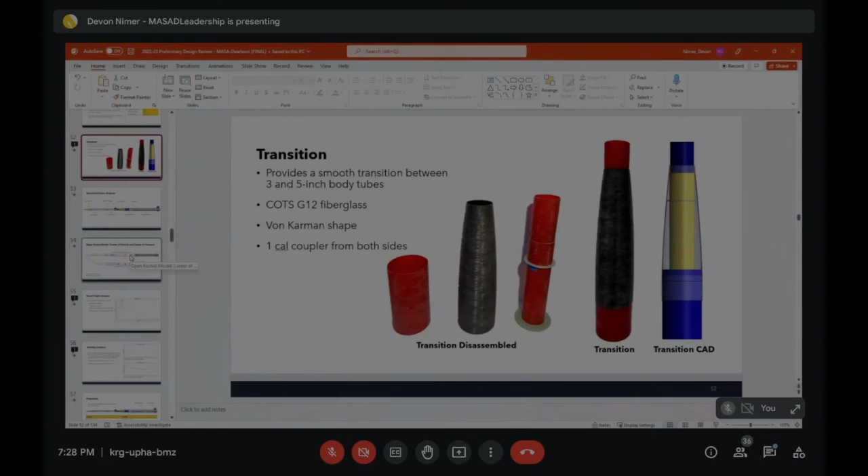My one thing is that your max speed is Mach 1.7. Above Mach 1, OpenRocket does not get very happy, and I think it tells you that when you run the simulations, that the equations they use for aerodynamics are not optimal above Mach speeds. There's a program developed for it called RAS Aero, I think we've talked about it before. It's meant for anything above Mach, so I'd want to run stuff through there. I haven't used it much myself, it seems very archaic to me, but it might get some use for you guys.

I also have a copy of RockSim Pro, which will also handle simulations above Mach 1. So if you guys wanted me to run that through RockSim, I could do that for you as well. That would be awesome. Yes, it would.

I'm on 63 for my next thing. 62. I guess I had something here as well. Go ahead, Rob, we probably have the same thing.

I appreciate this is just a symbolic illustration, so this may not be the issue I think it is, but at the moment your tender descenders are shown at the very point where your shroud lines meet. If you're really planning to have your tender descenders that far from your parachute, the point where it's reefing your chute for you, the odds of that reefing line successfully pulling through the base of your rocket drop drastically because your chute is going to be spinning as it drops.

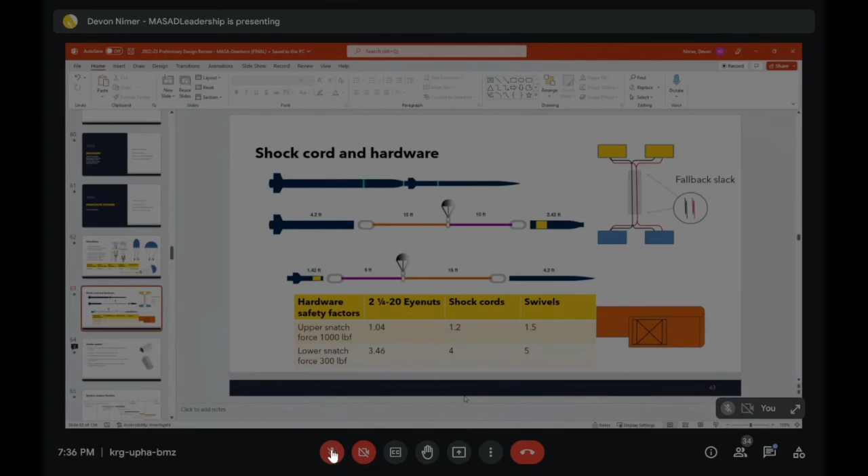With the smoke system, what material is this made out of? Is this enclosure 3D printed? Yes, it's going to be made out of PET.

Do you have a smoke grenade in mind that you're using? I don't know, there's not many details on what the actual device is. We're currently working on that. I'd be concerned with how cool something would burn. I guess smoke grenades—I know tear gas grenades get real hot, but I don't know about other smoke systems. I don't know if you built one, Rob.

I have. In fact, what I would tend to use in systems like this is just simply talcum powder or brightly colored chalk or something like that—press it in there and let it come out on its own. But if you've got an idea in mind for a low temperature burning smoke system, that's great. Just make sure you test it so it doesn't melt your container. All right, definitely.

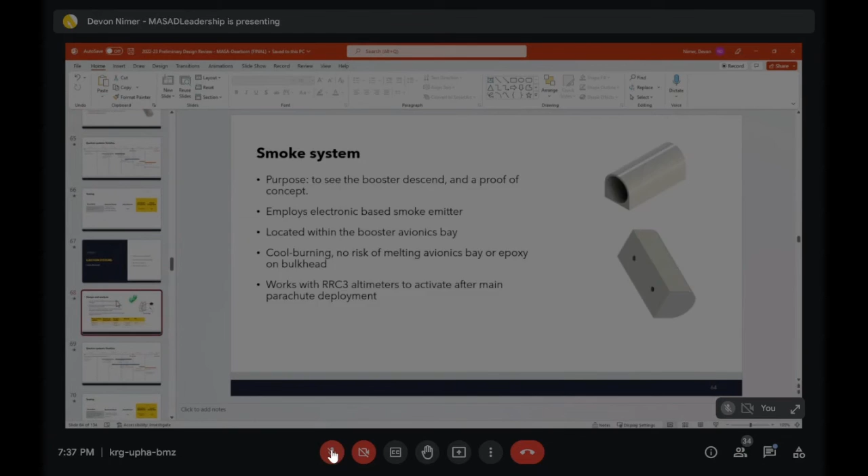Okay, my next one is on 68. Me too. Yeah, so mine was for, let's see, the shear pin size.

Are they 4-40s or what? The size isn't listed. Yes, they are 4-40s. Okay, they're 4-40s, good catch. I forgot to put that. That was my question as well. The number of shear pins is irrelevant when you don't know what they're made of or what their diameter is.

Okay, my next one's on 76. So this last year, we also had the tele-GPS in the booster. We had one in the booster and one in the Dart. Same configuration where the Dart one was on top of the payload and the tele-GPS in the booster was in this mount.

And we only got packets from one of those GPSs. After I thought about it more, this is the one that we didn't get packets from. I did notice that the antenna for this GPS is right next to and running parallel to a steel threaded rod, which I'll leave that up to Matt, our resident RF expert, to explain. But I don't think that does any help for the signal. I don't know if it's the only cause of why we didn't get any packets last year, but I can't think of anything else different between the two systems.

Is this an issue of not getting packets, or just getting packets but no GPS fix? Well, I don't know if we got a connection. I don't think we were getting packets at all. I think we got GPS fixes just fine where we got packets, but on the pad we just weren't getting packets. If I remember correctly, we were getting some stuff sent, but nothing was able to form a packet for the booster. But then after a while, we stopped even getting that.

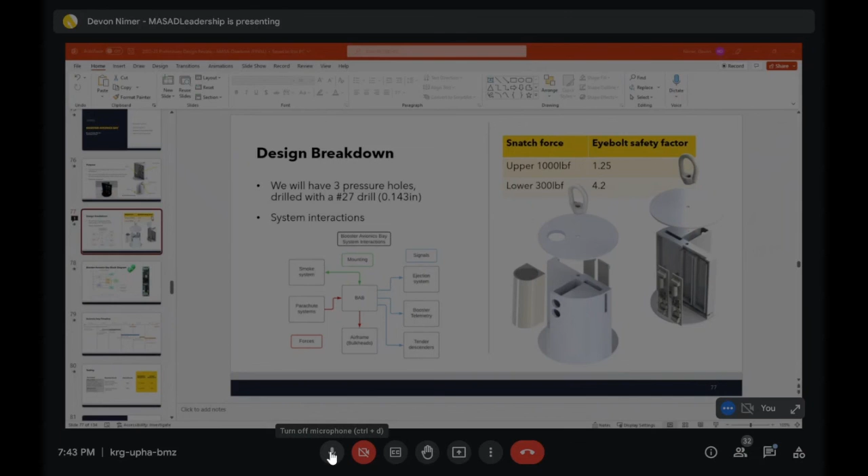All right, I'm on 78. Okay, this one, I think it was this one at least, where, yeah, body tube lipo charger connector. Is there going to be a connector sticking out of the side of the rocket, or is it just embedded in a hole? That was an idea. I'm not entirely sure if we will do it yet, but that's a good point.

Okay, and there's so much battery life on those tele GPS batteries, I don't know the circumstance where that's going to be too useful, especially because it seems like the bay is very easily removed. I know that last time we just removed them real quick and charged up the batteries when we needed to. I just wouldn't want anything sticking out, especially a piece of plastic, when you're going Mach 1.8. I know that I embedded my switches in the walls of my L3 build. The switch caps are just gone off the top of them. Yeah, so speed is not a joke there.

Next, I'm on 86, if no one's before me. Seems like I win. Okay.

My question was just on the mount in the top right. Are there 4 boards? I don't know how many boards there are. That's actually a battery mount. Yeah, there's 4 batteries, 2 for the tele-GPS and 2 for the experiment board. Okay, gotcha, they just looked like real thin board slots to me. Yeah, it's pretty similar to our design. Okay, yeah, okay, then no question there then.

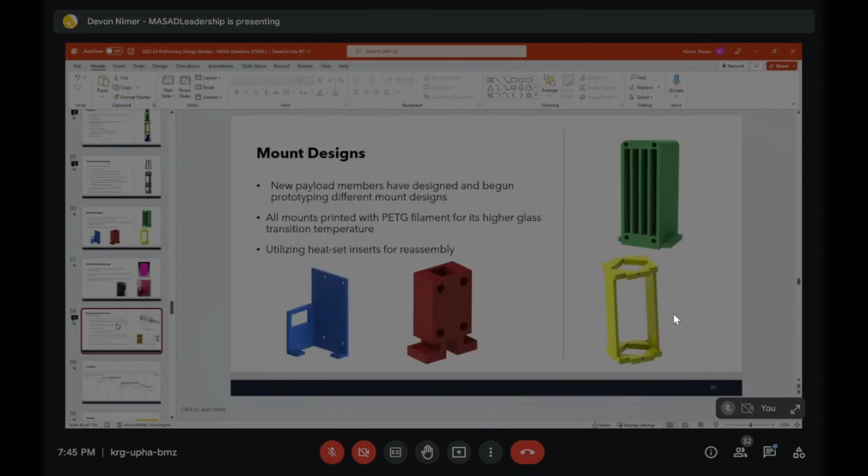88 unless, is my next one. Yeah, unless someone's about to say 87, I've got 88 as well. Okay, Rob, you want to go first? Because I'm probably just going to talk about electrical things that aren't relevant to you anyways.

Where are your strain gauges actually going to be mounted? Are they on the nose cone where the payload bay is, or down on the body? They're on the body, below the nose cone. That's what I was curious about, because the nose cone being a cone shape is inherently much more rigid than a body tube is. If you want meaningful numbers out of your strain gauge, putting them on the body makes a lot more sense. Thank you.

If Rob's all set, my main comment was that the setup for the strain gauges is a little bit odd. You correctly mention having them there to compensate for thermal drift, which makes sense, you should do that. The main issue is that, from what I recall, if you want to compensate like that, you generally want one of the strain gauges on something that's not going to be moving significantly, so it's basically just a reference of how the strain gauge behaves nominally with temperature drift and no other changes. Whereas what you're describing is giving them two completely different loads, which, unless you have some other resources on strain gauges that explains this, I'm not sure it's going to work how you expect.

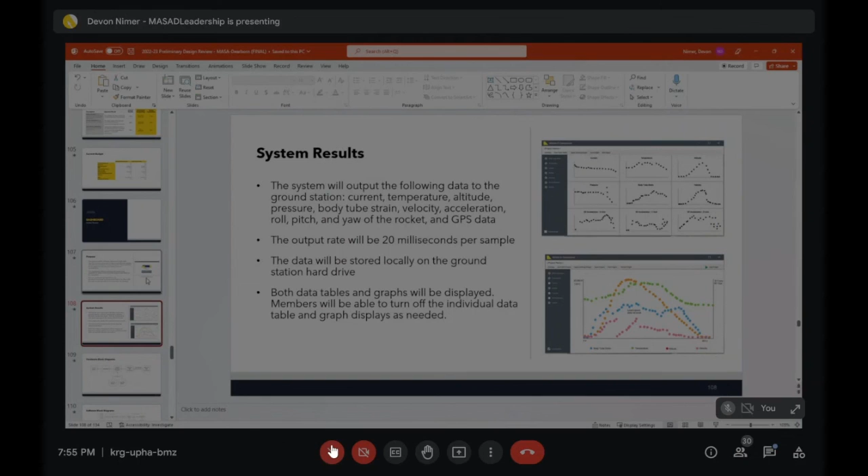There are literal USB adapters for XBees because they're just serial communications. It's literally just a USB to UART converter on a board that the XBee slots into. Those boards are supposed to be what you program them into, I think, or how you set them up. Yeah, they get programmed with AT commands, which is basically send a string over serial and it does a thing. So you can program them from anything, but they do have dedicated software for your desktop computer that you can easily configure them with by plugging them in over USB.

And to answer your question, Andre, we do have a couple of them already. Yeah, I saw them, and then I got one more thing before I get going.

Is your PiCam V2 on slide 112, you're talking about 1080p 60 FPS? There is no Pi camera in existence that can do 1080p at 60 FPS. Most you could do is I think 720 at 60.

And if you get up to 1080p 60 FPS, it's very hard on your storage capacity. So keep that in mind.

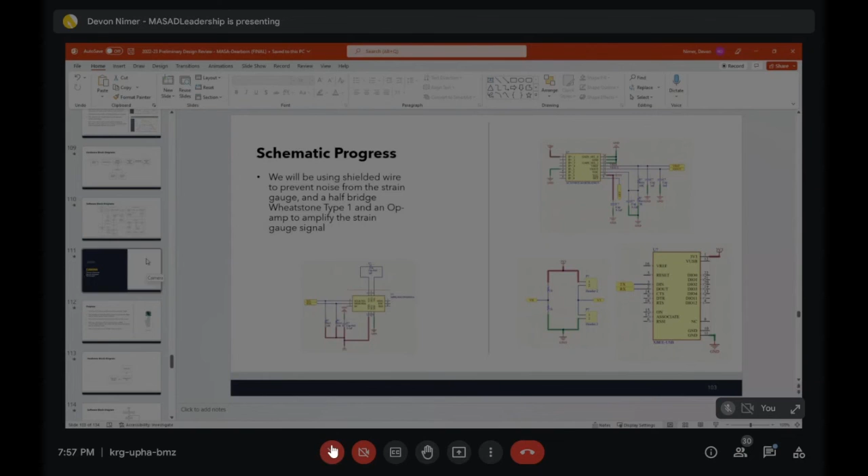And then a little bit earlier, on slide 100, that hardware block diagram definitely needs some work. It has a lot of parts that just kind of go nowhere that should be in between different things, like the current sensor, and it's not very clear what some parts of the diagram are for — such as what the 5-volt rail is required for, or what is using the 3.3-volt rail of the buck converter versus what's using stuff from the STM32 directly, or if the STM32 is being powered by which rail, things like that.

And that's pretty much it on my end. Okay, perfect. Thank you so much. Yep, thank you. May I add a couple more real quick comments?

Of course. On slide 94, you talk about possibly changing over to 400 megahertz. Make sure you're double-checking the documentation and requirements of the launch, because at least last year there was a requirement of staying at 900 megahertz. You'll want to make sure the rules allow you to go to that range if you're looking to do it. I think Erin made a comment about that too in her notes for you guys.

Sierra, do you want to say something? I was just going to say we did this at the same time last year, and unfortunately the weather made it so we couldn't get everyone certified, so we're hoping that doesn't happen again.